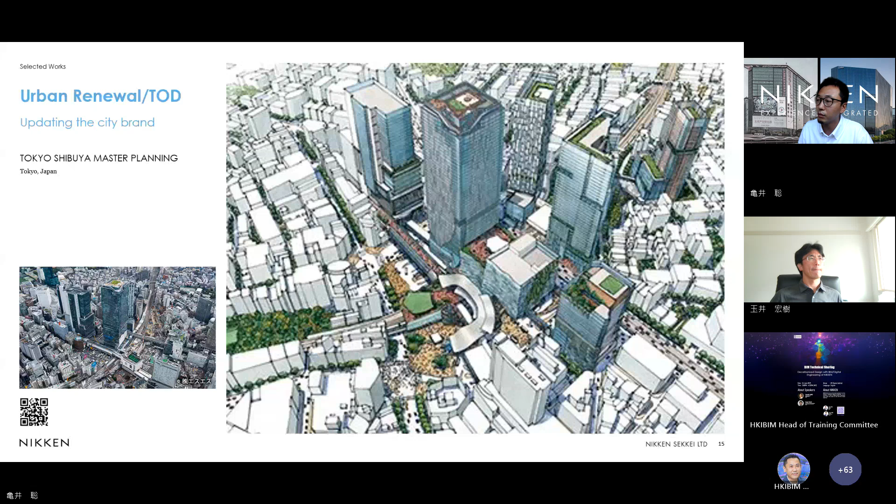You can see all projects on our homepage. This is a TOD in Shibuya district, and we also have these featured materials projects.

We are trying to realize projects that combine the quality exported from Japan with dynamic designs in global markets.

So we return to today's topic: NIKKEN Decarbonized Design with BIM and digital engineering. Today we'd like to focus on this topic.

In NIKKEN, we have this Tech Design Group. This group consists of three sections. They collaborate with designers on valuable projects using their specific skills.

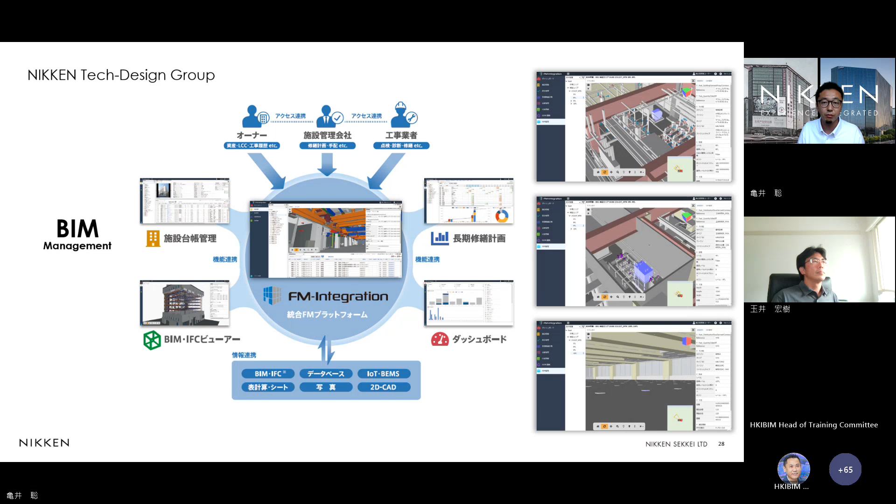And this DEL, Digital Engineering Lab, consists of special teams for specific engineering. Today's other speaker is from this DEL, so he can introduce it more later.

Last is the DDL, the Digital Design Lab. They are pioneers in using programming code to solve architectural and urban problems, including developing AI for architectural planning or 3D printing constructions and so on.

So we proceed with projects fundamentally collaborating within planners, designers, and architectural engineers. We can also collaborate with advanced engineers to realize a nicer, more comfortable, sustainable future.

This is today's content. Decarbonization is one of the most trending words in recent years in our architectural field globally, as you know.

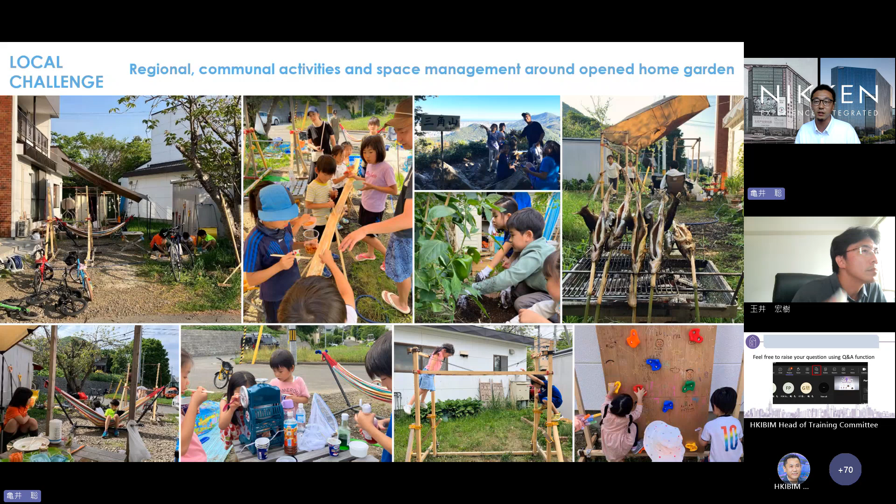So, I'll show you my projects from my viewpoint, my philosophy. This project is the reason why I'm here today, because I collaborated with Andy in HKIBIM from Tech for this project.

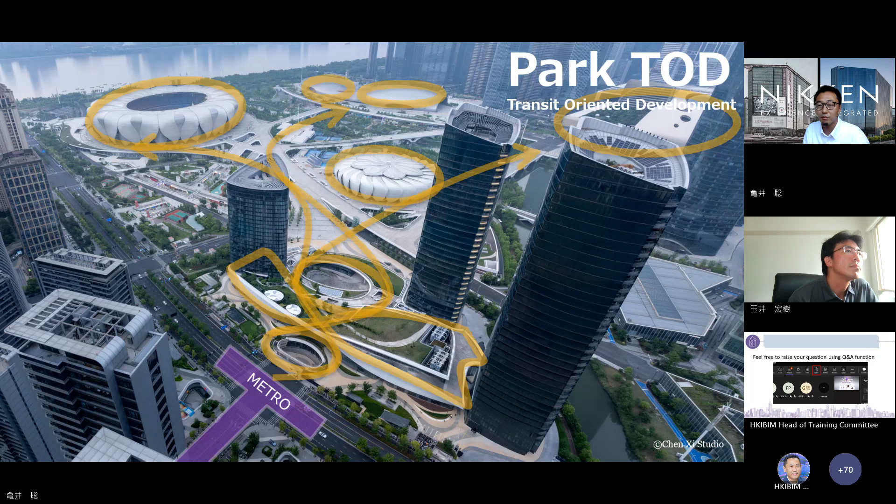This flow-like curve is not only for visiting people, but also for the landscape, greenery, the wind passing through, and the sunlight making shadows. The landscape on the rooftop is not completed yet, but it can be like this in the near future.

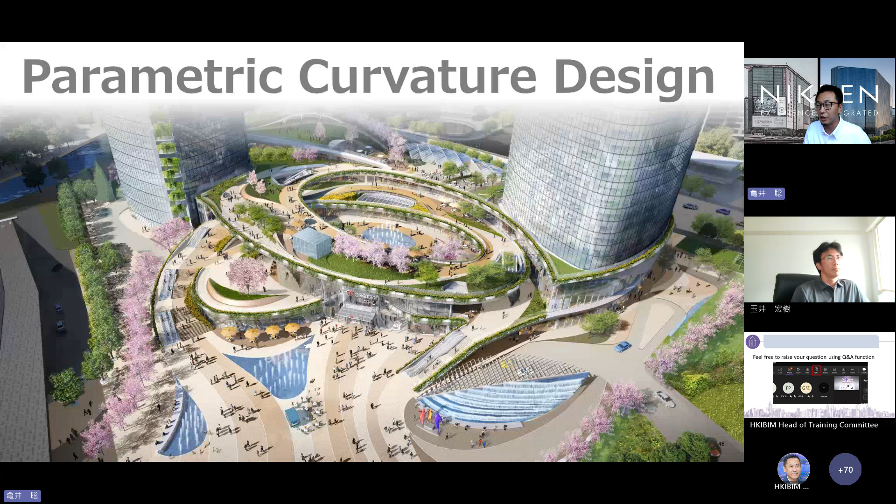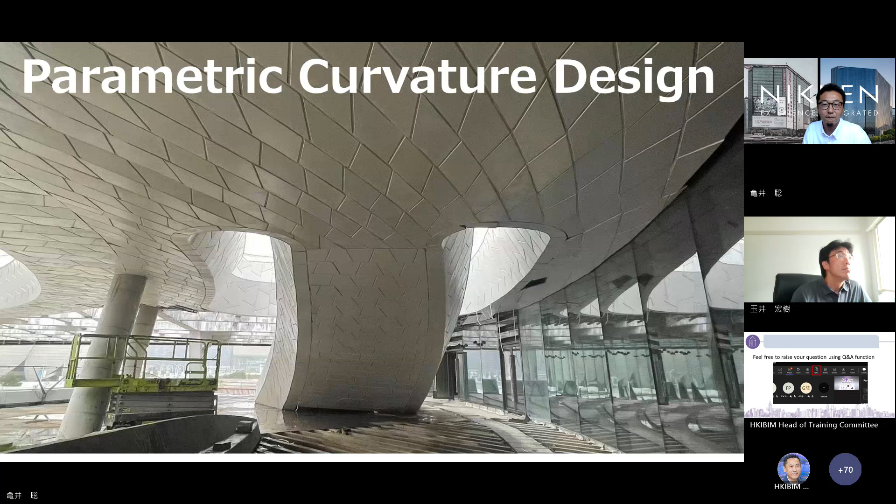And now it's like this, but in the near future, this place is to become a concentrated wellness park for living and visiting people here.

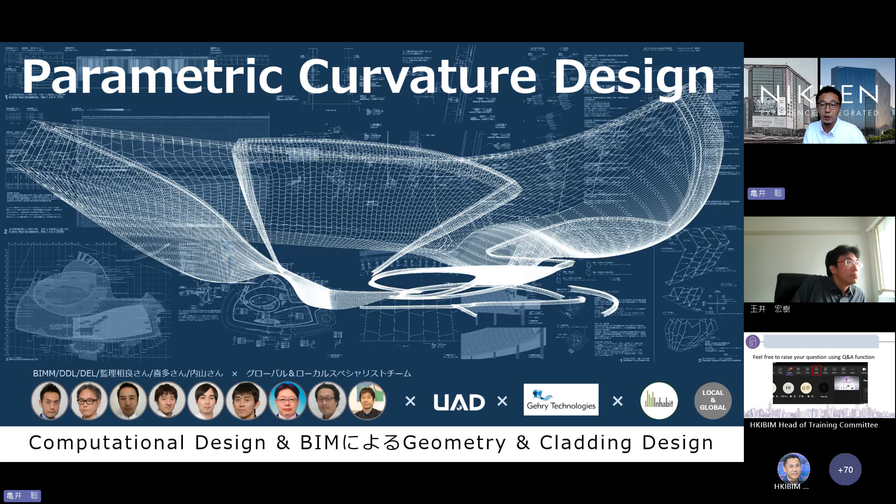In order to realize this complex design, we collaborated with internal and external specialists, both locally and globally, including Gehry Technologies.

Of course, this construction is much more difficult, but our clients and the construction teams made much effort to realize these complicated shapes and cladding.

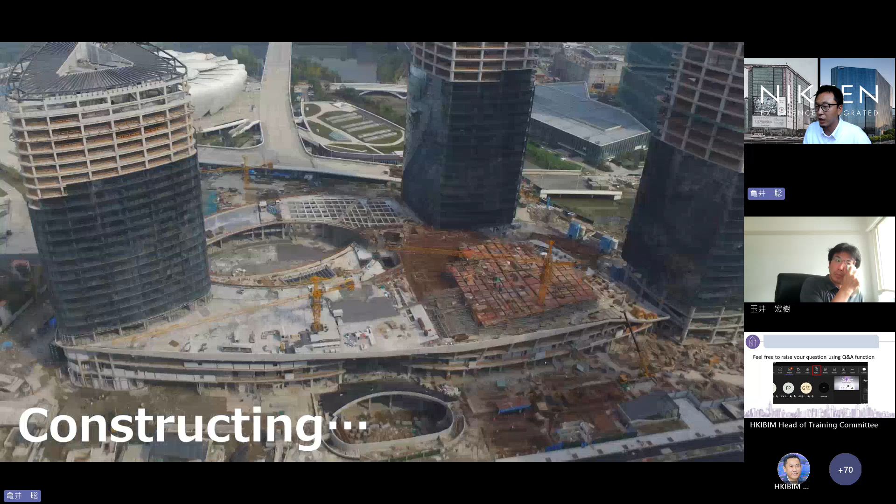When completed, this roof garden and the Olympic Park will connect to each other in one shape and one flow, to generate a new park-scape activated 365 days and 24 hours.

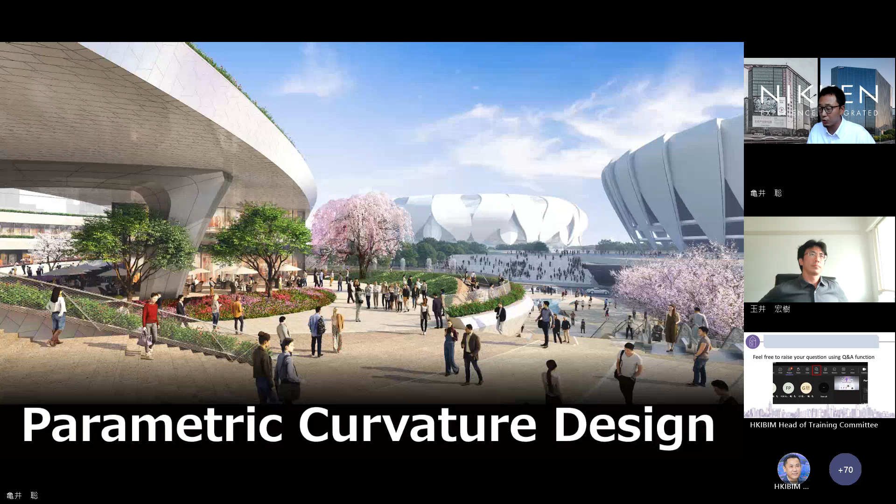So the building is almost completed, like this.

Technology allows us to trace natural elements to shape an architectural form. We need to decide the form carefully from the composition between every element in the site and surrounding the site. We might transform the surrounding visible and invisible environment and landscape through our forms.

So I will go to the next project. The second project is Takatsuki Arts Theatre, a cross fusion of digital and real. Actually this is not my project, it's by other designers, but I like to introduce it because I agree with the concept, and it must be replicated elsewhere, maybe in Japan.

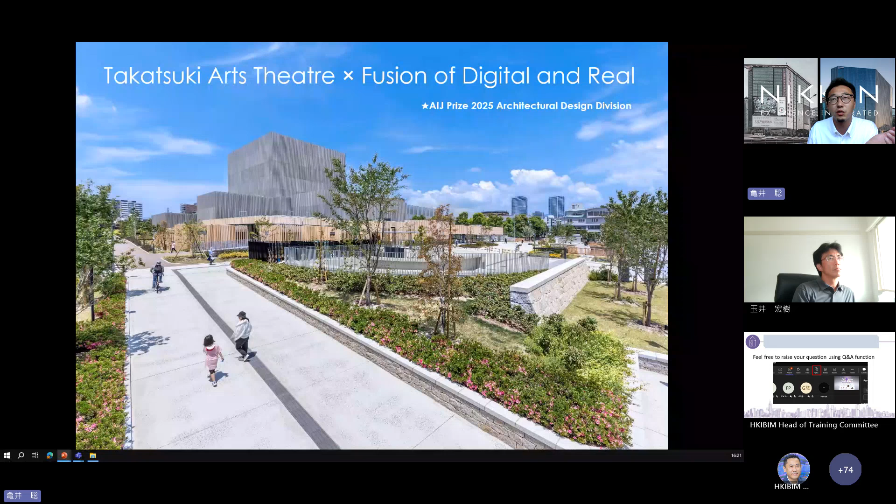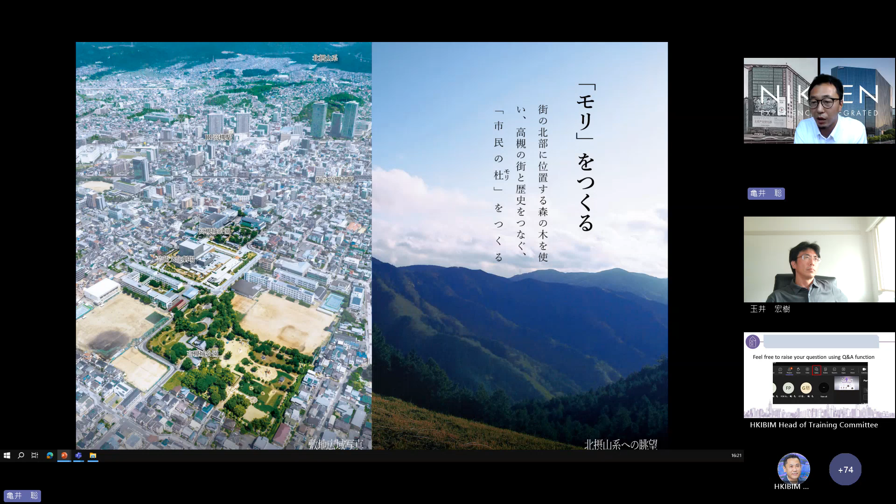This project is located near Osaka, in Takatsuki City. The area of this city covers part of the Hokusetsu mountains, similar to other Japanese cities. The concept is to create a forest in the city center by using internal woods in the city.

Forest covers 66% of the land in Japan. These wooden patterns in timber louvers are familiar in historical Japanese cityscapes, and the traditional structure of Japanese houses is wooden framework construction.

So human life needed much internal wood material. Many trees were planted in forests near cities more than 50 years ago in Japan, everywhere. But globalization and modernization changed the production of internal woods and their supply.

When the designers started this project, they recognized the quantity limitation of internal woods in Osaka Prefecture, which produces 1,600 cubic meters of wood annually.

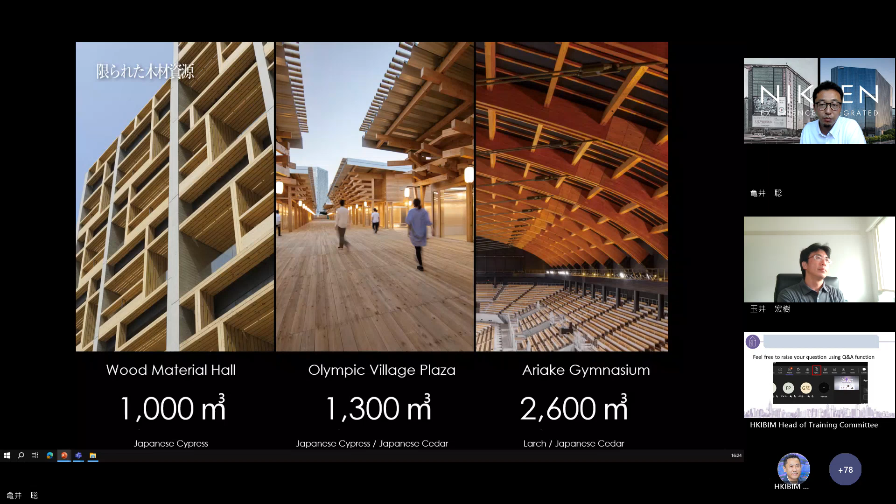So they decided to use 350 cubic meters of wood, divided over 3 years, only for finish materials, not for structure. This must be the best quantity and quality for the Osaka forest, they thought.

How to use these limited woods without waste was the next problem. The logs were sawn up and distributed according to sectional parts, since different parts have different properties.

The core, the central part, is usually used for structural timber, with slits, and the core is not used for finish. The middle part has a waterproof feature, and the outside part has water absorption and can be impregnated to be non-flammable.

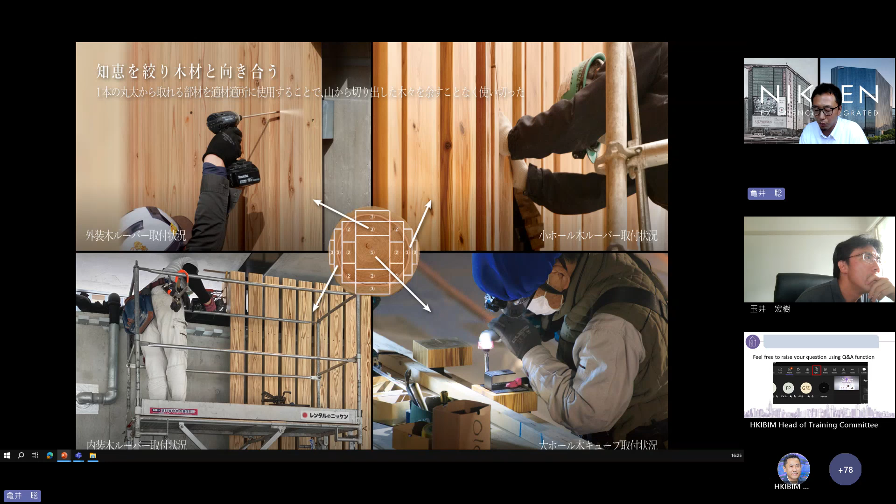According to these material properties, the woods were distributed to different places, creating different and specific expressions.

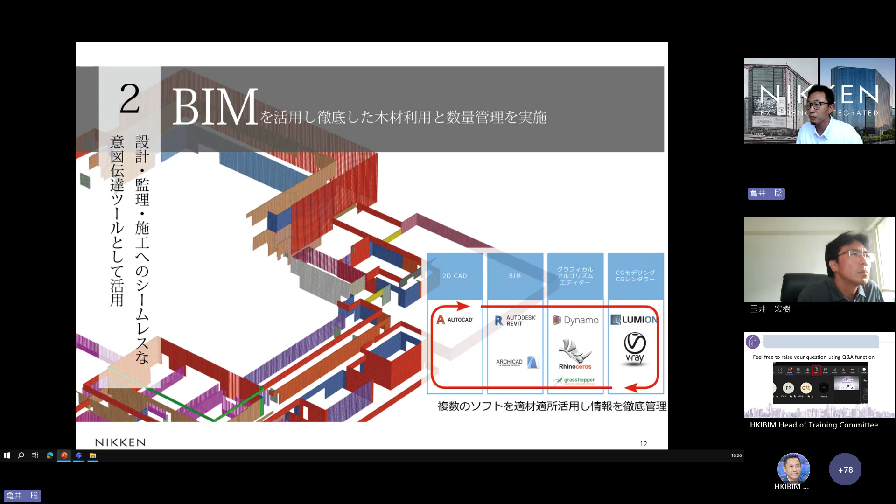This wood distribution and design has been controlled by BIM and other familiar design tools, as a method to control the quantity of wood materials. The number of sawed timbers, classified and calculated, was estimated before they were cut in the forest.

Of course, this number might change after they're sawed and calculated again. Designers make patterns for each division using tools like Grasshopper or other parametric design software. At the same time, BIM can calculate how much timber is used compared to the supplied quantity, so they must avoid both lacking material and waste.

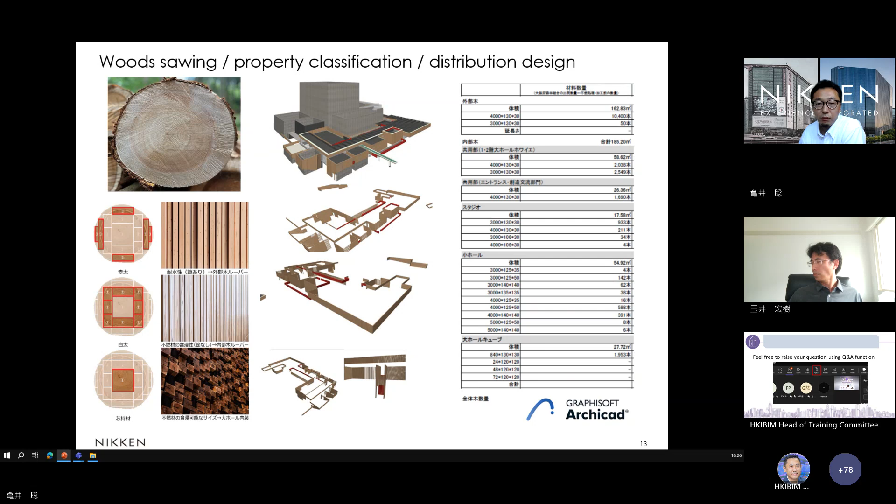This is the exterior waterproof louver made from the middle-part timbers. It's designed with Grasshopper, and tags were put on each louver with sizes indicated, leading to error-free installation along the tags.

Here are the louvers from inside; sunlight passes through, so it feels like being in the forest. This is the interior wall made from the outside part of the wood, impregnated with non-flammable liquid, since interior materials are required to be non-flammable under our architectural standards in Japan.

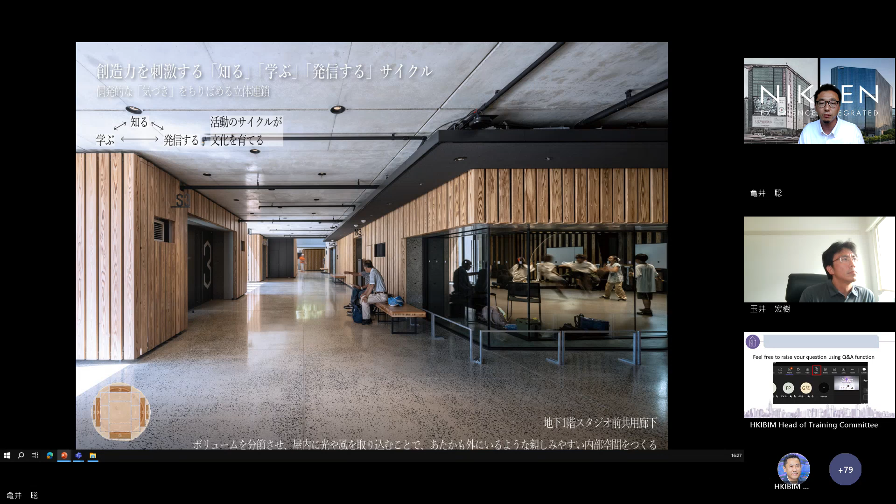This is the small hall. In this hall, the wall and ceiling are made from the outside part timbers.

Their angles of each timber are controlled from sound effect simulations, like this.

And at last, the grand theater is totally covered by the wood core cubes. As you see, you can see the cubes on the walls and the ceilings.

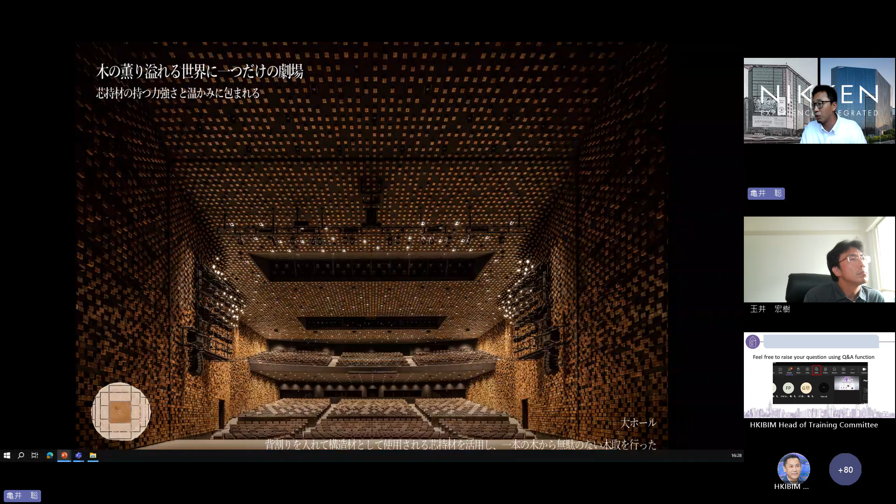Of course, the sound effect and visuals and construction ways are also simulated in BIM and other programs.

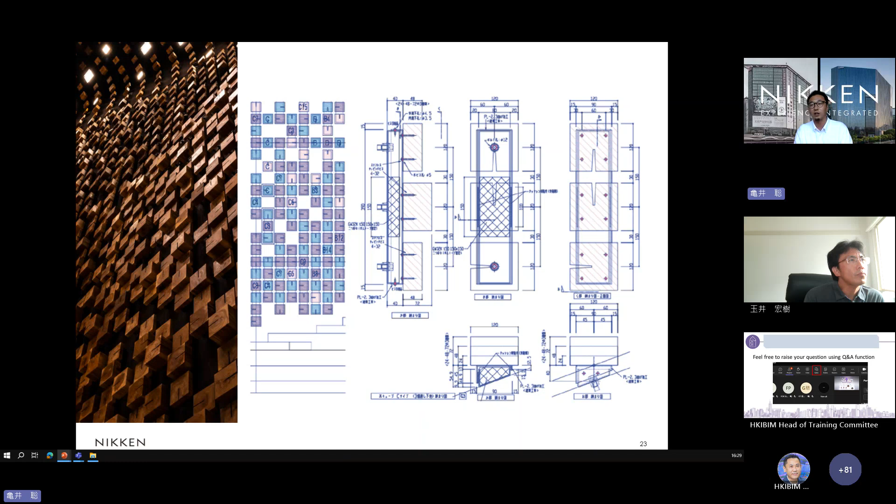But actually, the designers and craftsmen finally complete this work in a handmade way, like this. So this is the masterpiece collaborating technologies with craftsmanship, I think.

So this is the visuals, the final visuals of the whole.

So from this project, I think the technology might help to update the relationship between human life and the forest, which was forgotten after global modernization. And this topic might be a Japan local one, but I think it's also global scale, regarding the global environment.

So then I will pass the microphone to Tamai-san.

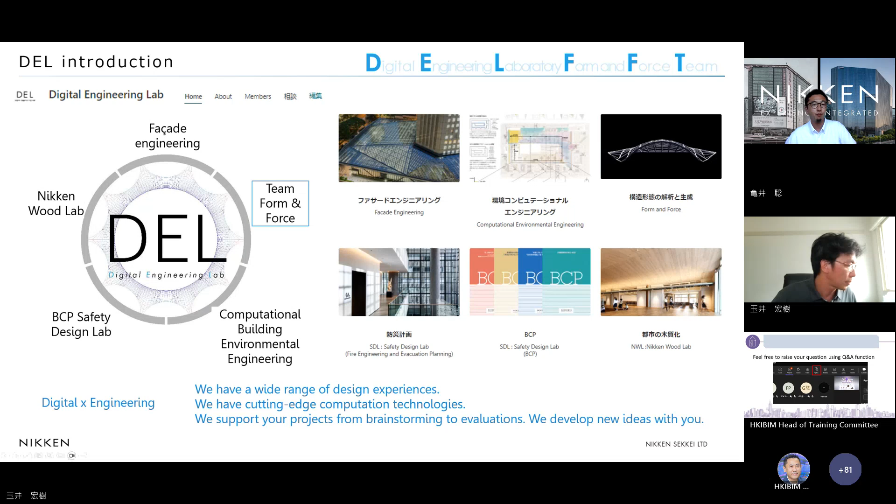So today I'd like to introduce the methodologies that our team uses to reduce embodied carbon in structures.

So form finding, structural form optimization, and graphic statics are our primary approaches. We do other things as well, but I will talk only about these three today.

Form finding corresponds to how nature uses materials, and structural form optimization is related to finding how nature makes a building ecosystem in nature. Then graphic statics shows us graphically how form and forces are related by duality.

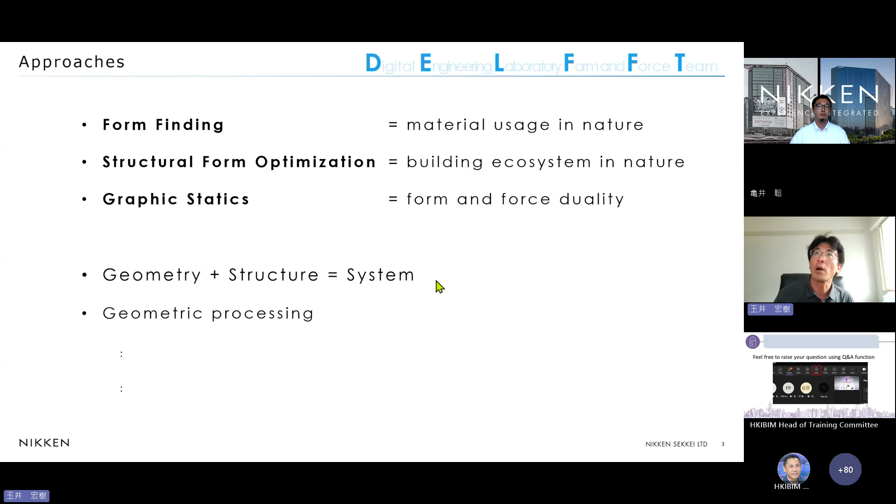Okay, let's start from form finding. Let's look at these four simple but yet essential structures.

Shells under compression on the left, spider web under tension, soap film in tension, and self-stressed spine and muscles under both tension and compression. All of these shapes transfer forces with zero or almost no bending.

This is how nature maximizes the use of material strength.

Did you notice that these materials have no shape of their own? To build a structure with these materials, we need to give the right shape through which the force can transfer smoothly without generating bending in the members.

They are namely shells, cable, and membrane structures and tensegrity. They can be stiffened by pre-stressing.

Unfortunately, you cannot choose a form like freeform for this efficient system. You have to find a form in equilibrium. This is why this technique is called form finding.

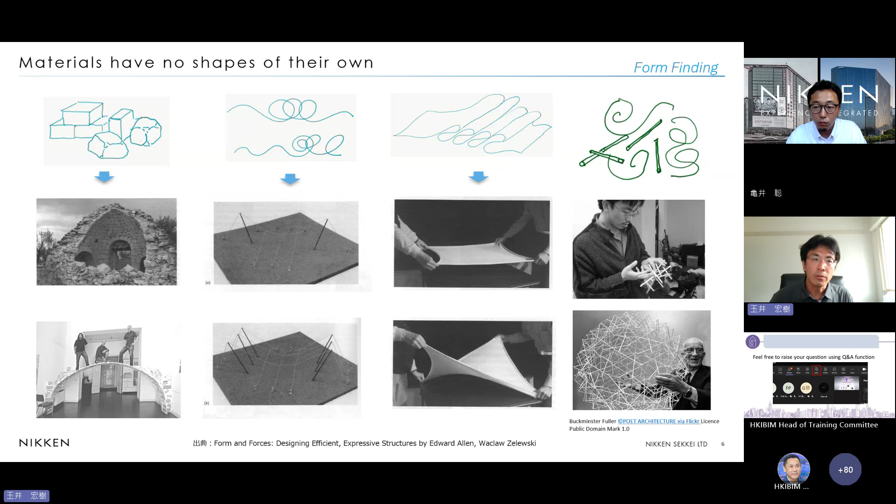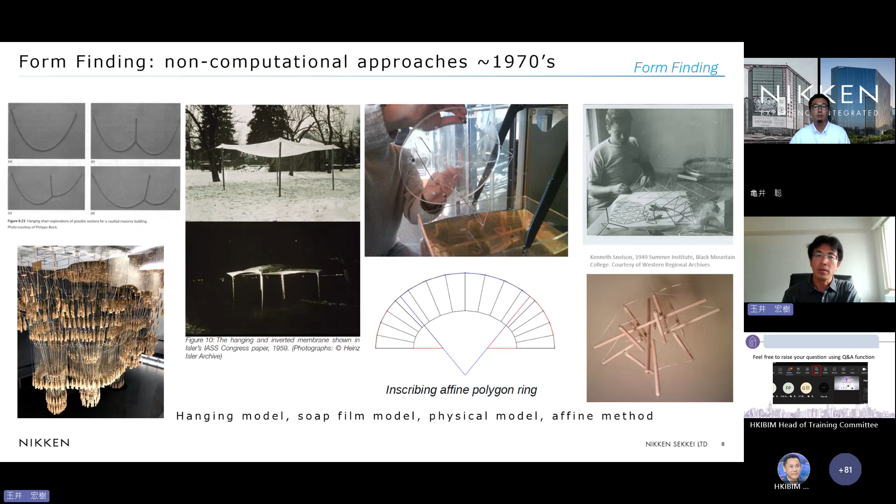How did they find the forms? Historically, before computers became available, they used physical models or graphic approaches, as shown in this slide. Nowadays, we use computational methods.

I will show you a few visualizations of computational form finding for typical structures that require the form finding process. These are, for example, grid shell, cable tower, or these are variations of spoke wheel system and footbridges.

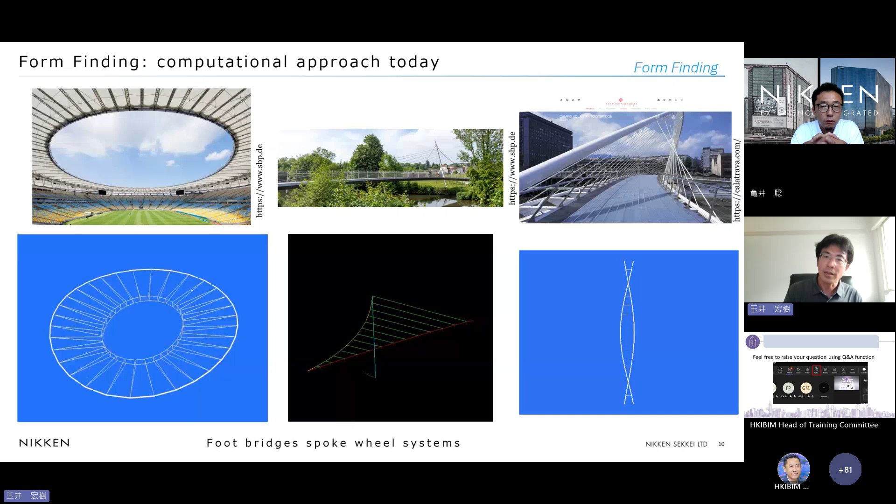Please note that these demonstrations are conceptual and intended to illustrate how they work and how they have been applied. My concept study has nothing to do with the actual design of the structures used as reference in the pictures.

Although I'd love to show you how we can apply these techniques in our office, it's a bit unfortunate that I'm unable to share most of the projects because they are ongoing projects. But I will show the next slide.

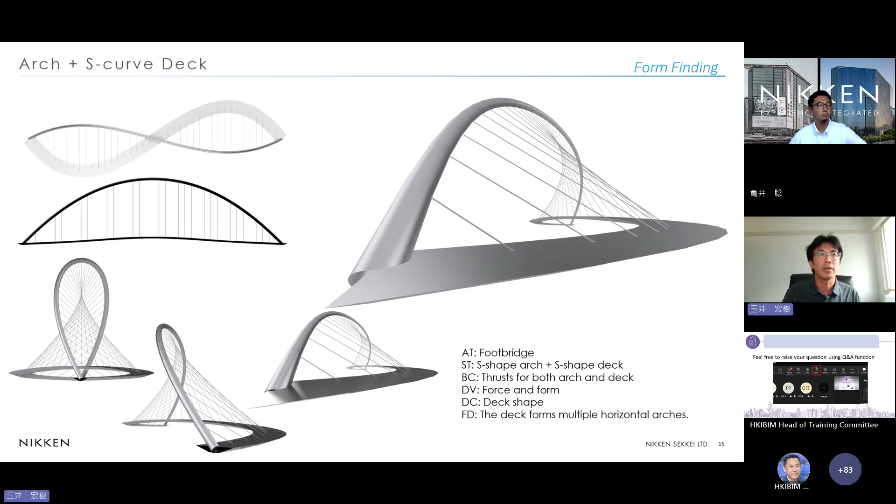To give you some more ideas about what you can do with form finding techniques, the following slides show more conceptual studies. This study shows that if the footbridge deck is an S shape, the arch follows accordingly. I hope this result starts inspiring you.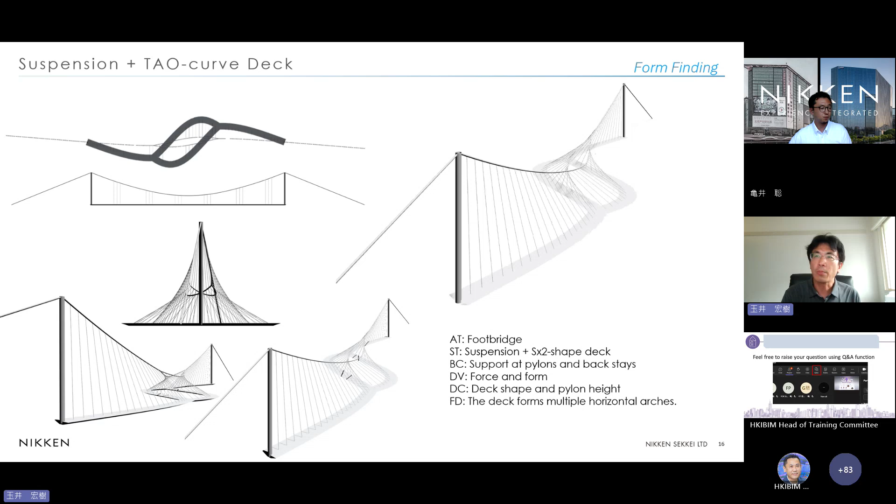This can go a bit further in detail to show that the equilibrium form can be further balanced in detail. This has an eccentric load, but please recall that all elements are in equilibrium.

The following two slides will illustrate the form finding of a cable net structure used to suspend a retractable membrane roof. The first assumes a stadium scale, with the boundary as a rigid oval ring. This form finding problem has more than one unique equilibrium solution, so we can choose one such that the membrane can fold along longitudinal directions without tearing. The sum of the force differentials is minimized to reduce the required clamp size.

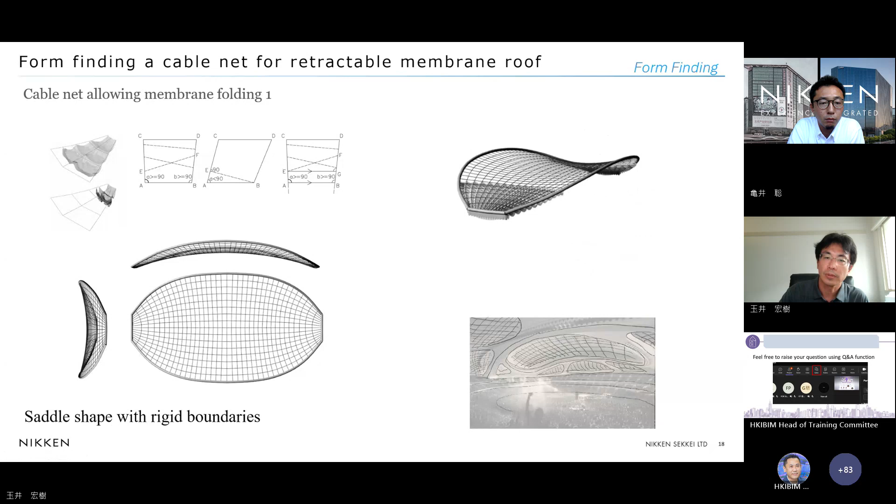The next one is similar to the last one. The difference is that the boundary for this project is not prescribed; instead it is part of the variables to be determined. In this project, the covering was proposed for an amphitheater on one of the school campuses in the US.

These two cases demonstrate that a form determined by a form finding technique can represent not only a force equilibrium, but also an architectural concept.

This is an experiment, a thought experiment. In my opinion, one of the limitations of tensile structures used in architectural design is that a tensile system always requires a saddle shape. Can a tensile structure have a convex shape all around? I challenge this question, and this is one of my answers.

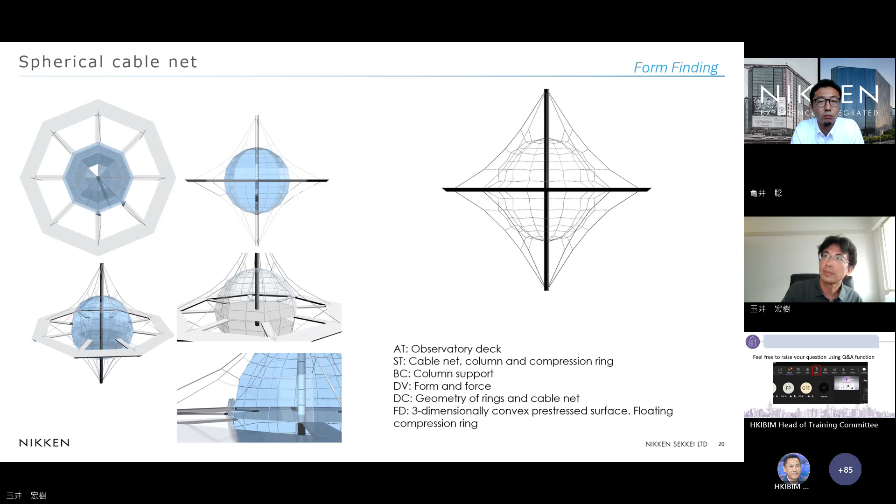All right, so the next story will be about structural form optimization. Let's ask ourselves what optimal design means. We can find hints in nature again.

Do you know this fish? This is a flounder. It lives at the bottom of the sea, lying flat, so it must feel higher water pressure than other regular fish, especially when it pulls up its body from the ground. It needs a lot of force.

Let's see its bones. It is different from other fish in terms of the position of the joint. Probably this makes it easier for it to pull up its flat body from the ground. So what else? Let's look more closely. If you look very carefully, you can find each bone shaped like a wide flange steel beam.

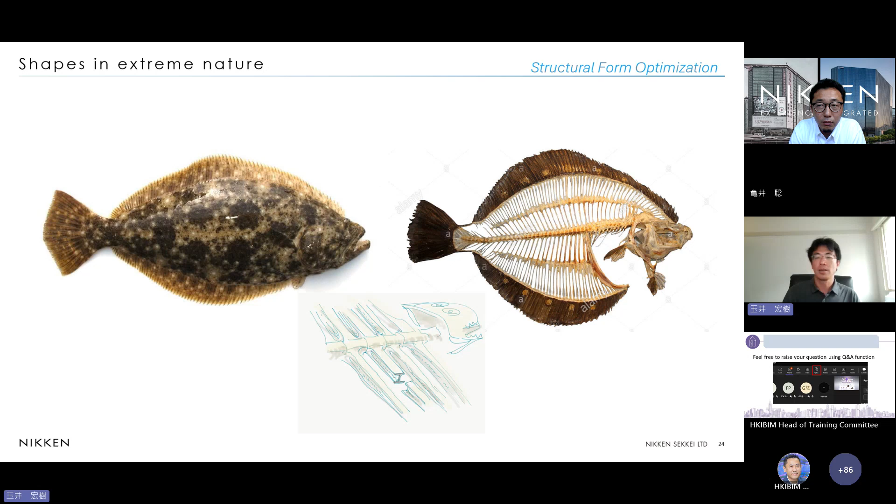I think it's amazing. And yes, I sketched this because I forgot to take a photo when I was cutting and cleaning this fish, which I remember very well. So next time when you cook this fish, please watch very carefully.

One more: this is a picture of a giant cactus. They can grow in extremely hot and dry regions, and they store water in their stem. So where is the structure then? If we take a look inside, for me it looks exactly like a tube structure for a super high-rise building.

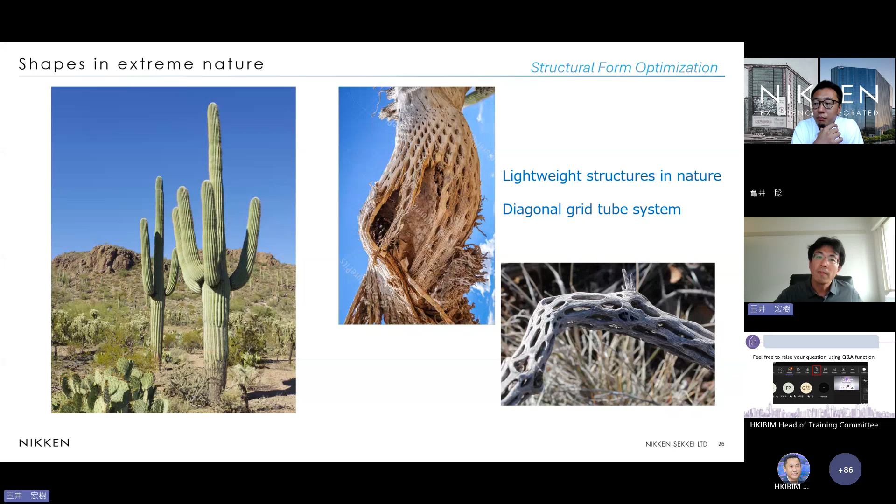So what can we learn from these two creatures that live in extreme environments? My interpretation is that adaptability extends diversity. This is actually how I look at form optimization of structures.

Technically speaking, optimization is nothing more than minimizing something under specific conditions. It can be displacement, steel tonnage, etc. Anything can be chosen. The other variations in structural optimization include optimal assignment of cross-section, topological optimization, form or shape optimization, or a mixed use of these techniques.

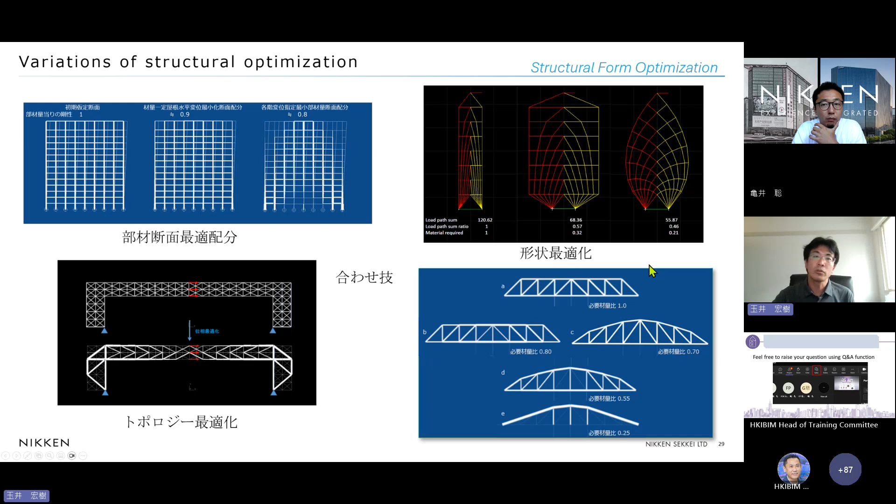Why do we like to optimize the shape? Because it is more effective than cross-section and more practical, in my opinion, than topology. So let's see a NIKKEN project now.

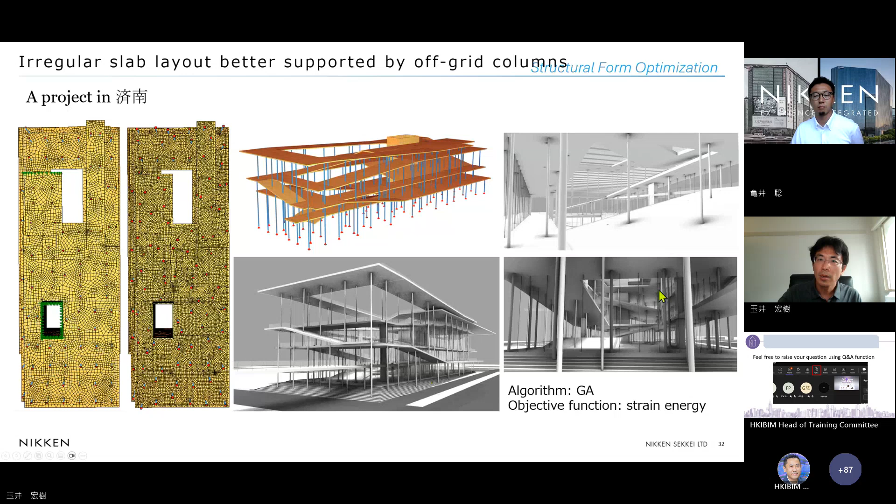This building, part of a project in Jinan, has an irregular floor slab layout. The column layout in a regular grid would not make sense. We applied a heuristic optimization algorithm to find the better column positions, which in the end appear very random, but successfully reduce the floor displacement to one third.

This is a regular one. This is the optimal column position.

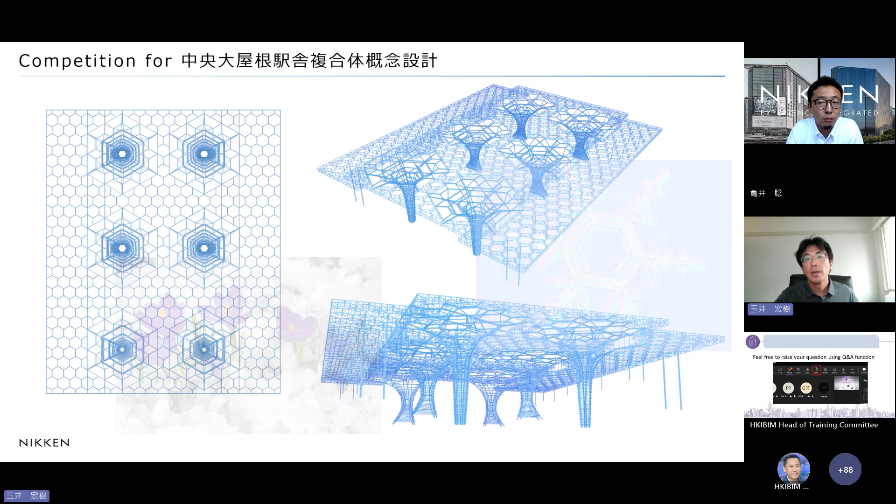By applying horizontal load in form optimization, we can see that bundled columns are transformed into a bracing arrangement.

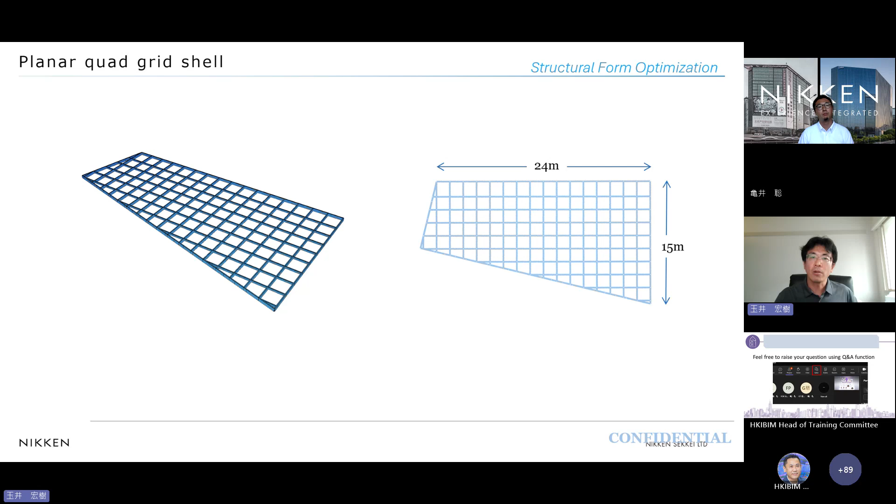In the following slide, I will show you a grid shell form optimization for a partially rectangular but asymmetric plan. It is required to have a squared grid mesh in plan, and of course the quadrilateral frames are supposed to have planar glass paneling.

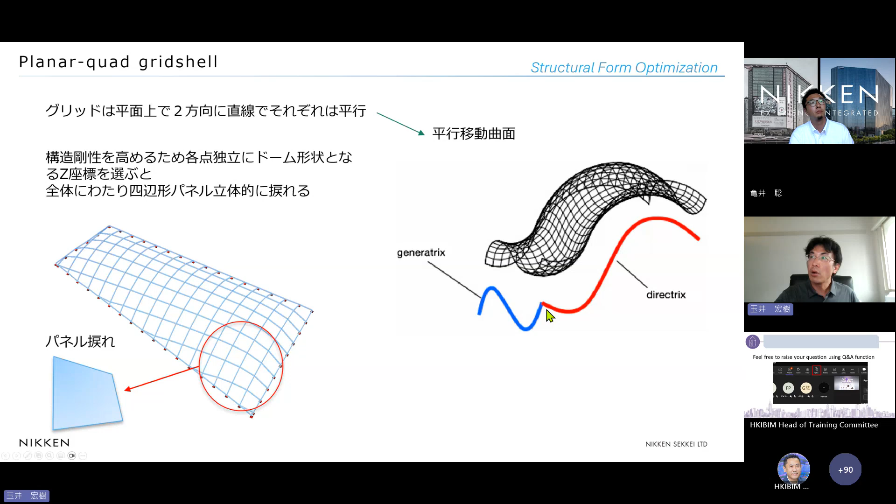If you take z coordinates of all nodes as an independent design variable, you will end up with a twisted panel. So we apply a translational surface, as shown on the right. By translating a polygonal generatrix along a directrix, we can generate a surface with all facets being planar. Therefore, our design variables are the shape of the generatrix and directrix.

However, we have another challenge in this problem: boundaries have to be modified accordingly. So these are our proposals for the designer. Please recall that all quadrilaterals are planar and boundaries are updated during the calculations.

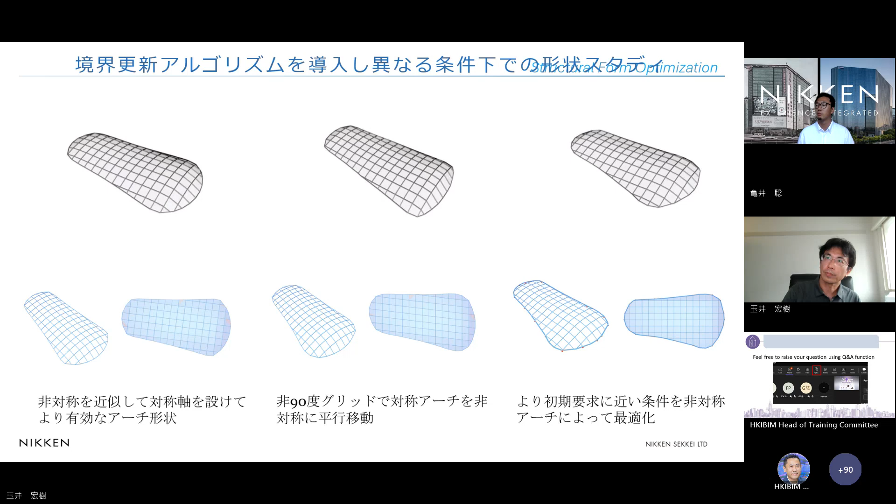Sometimes we don't need to make planar panels strictly planar. In the following slide, I will demonstrate how to create a smooth grid shell without using control points of the NURBS surface, like in Rhinoceros.

The simple case study illustrates that the corrugated roof can reduce the displacement, potentially leading to a reduction of steel tonnage. However, with all the coordinates being independent design variables, the solution shape will be zigzag and not so smooth.

So we apply a Gaussian function as a low-pass filter, analogous to pictures, sound, or graphics. Depending on the size of the filter, we can change the degree of smoothness of our structure.

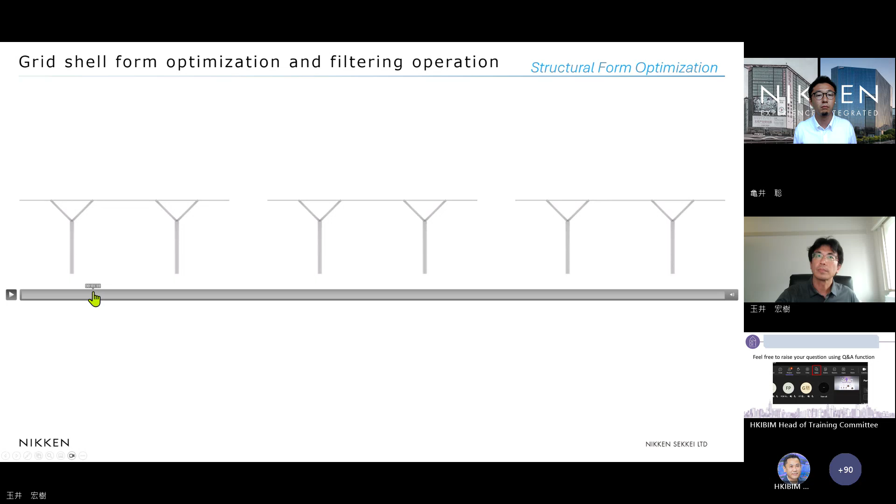This project is an example in which the filter operation filters the optimization process. The filtering process is performed not just at the end, but throughout the whole optimization process.

In this case, without filter, it can potentially save 40% of steel tonnage and the corresponding carbon dioxide emissions, but it goes a bit too far from the architect's desired shape.

So we filter with the proper size, and then we can achieve a smooth approximation of the desired form while still saving 15%.

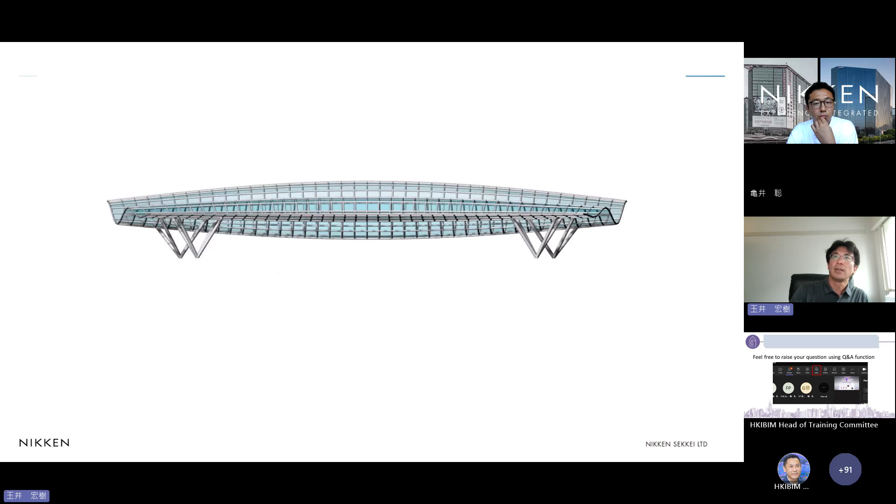This form optimization again is an experiment to see how form follows force and how the filter can effectively smooth the surface. Now that was without filter, and that was zigzag. Now with filter, can you find the form follows somehow the moment diagram, right?

So now finally, we will explore the duality of form and force. It is more than how form relates to force and force to form. What this duality indicates is that form is identical to force. When you see a form, you already see force.

When you studied architecture in school, many of you learned how to solve the truss graphically. Remember or not, all you need is a pen and a ruler, translating this geometry into a force diagram. In the force diagram, the lengths represent the magnitude of the force.

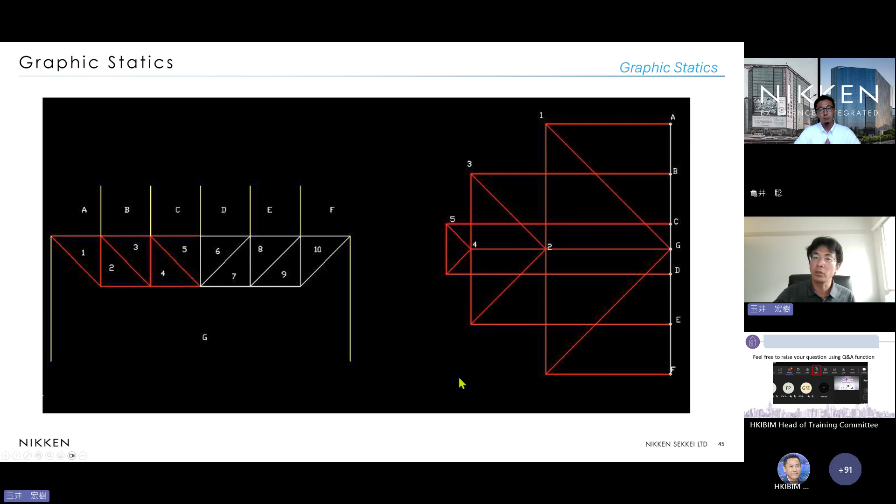There's actually another step that you might not have learned in school: you can play with the force diagrams to make the lengths smaller or zero. In this case, the force between 3 and 2 becomes 0, and these become equal. You trace back to the form to have this truss, which does not need diagonals.

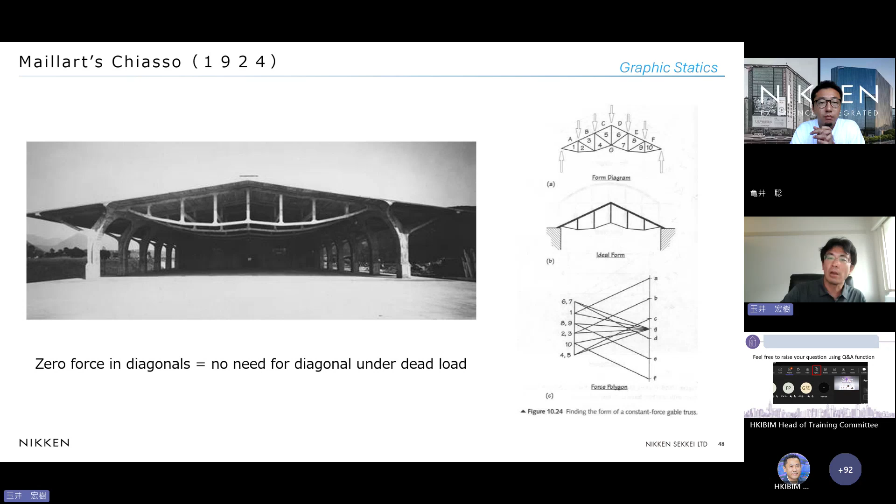I will show you 3 legendary built examples that are believed to utilize this classic technique. The first one is the storage roof in Chiasso, designed by Robert Maillart. Now you already know why this truss does not have diagonals.

The third one is the Salginatobel Bridge, by Maillart again. He used graphic statics to determine the arch shape of the bridge and the sequential variation of the cross section.

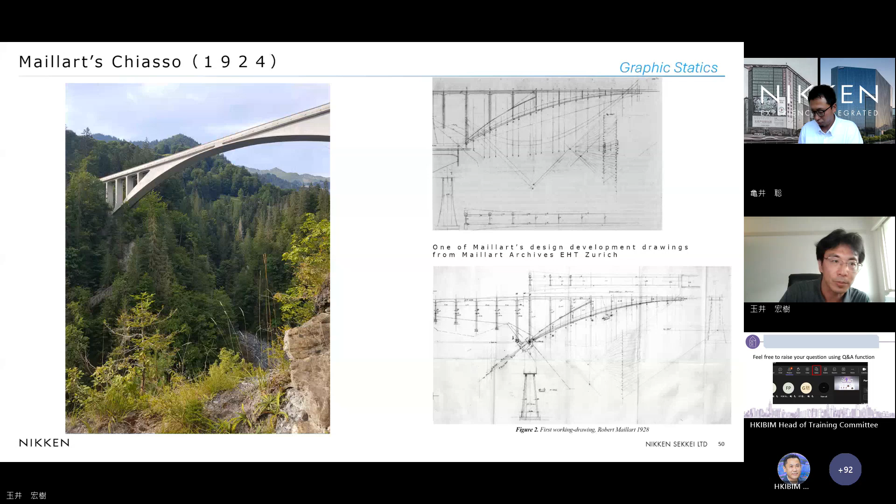Unfortunately, again, I cannot share any project where we used a graphic statics approach to design in some of our projects, but instead I will briefly explain the duality of the method and how it can be applied to the form finding of a spoke wheel structure.

So this slide illustrates how form and force are dual. This is your familiar truss form diagram with force indication here, elevated vertically to make a polyhedron.

Each node of the polyhedron is associated with 3 XYZ coordinates. With these three pieces of information, you can represent one surface. This is a dual relation.

Then convert this polyhedron to this other polyhedron, which is green here. Now project down to the ground, and you have the force diagram that you saw a few slides back. It's like magic, right? But this is...

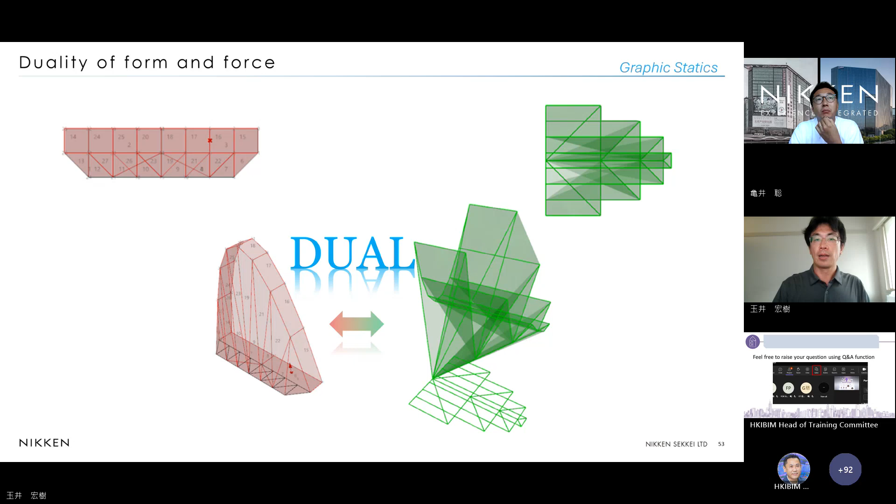dual. Applying this concept, you can perform form finding for spoke wheel roof systems much more efficiently. The left diagrams are forms, 2D forms of the spoke wheel system, while this one is a force diagram. They are identical, but the forms are different.

This force diagram represents equal and uniform forces in ring members, and actually in spokes also all equal. But you can choose forms. So this is an optimal set, but you can choose the form. This is the important point.

For example, this one is selecting the form by minimizing the sum of the squared length of the ring, and the other one is minimizing the variation of the length. Good things are not only the force optimal set, but also you can draw this geometry without using nonlinear calculation at all.

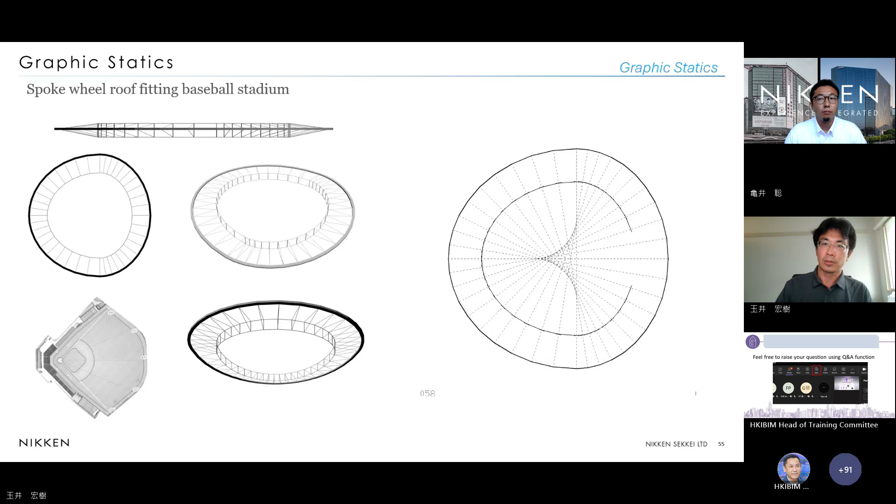Then applying the duality, the polyhedron, you can solve the spoke wheel with more arbitrarily selected ring geometry, like these ones. So this is a totally new horizon in this field. This was just a brief introduction of this 3D stress polyhedron

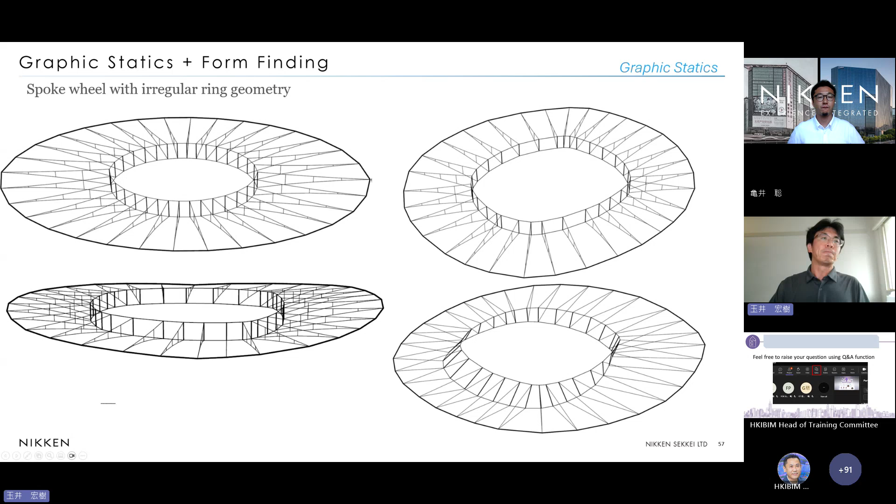because I couldn't show any of our projects. So, this is my final summary. Form and force matter for structural efficiency and the economy of natural resources, and reducing embodied carbon. Form and force matter for architectural design expression and diversity of structural potentials.

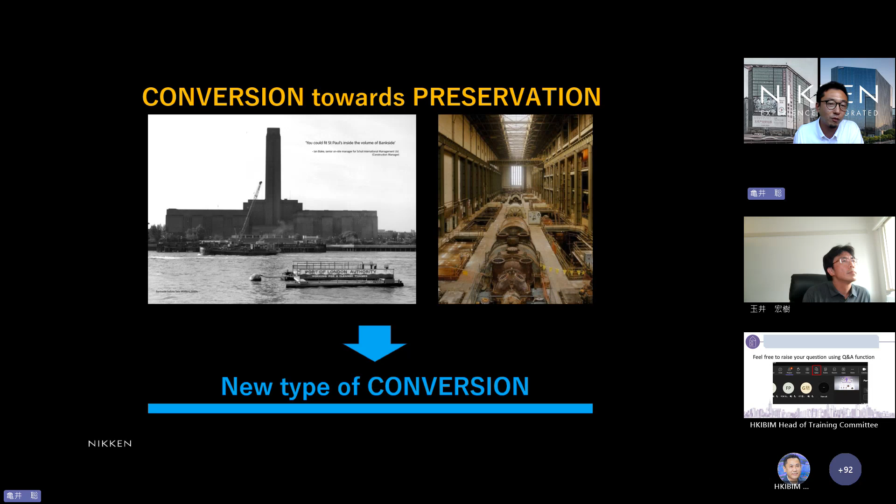I can tell you these 3 reasons: one is speed, second is program, and the third is system. About speed, recent Chinese growth has been extremely rapid, as you know. These 20 years are long enough to change construction technologies more than the same term in developed countries.

The second one is about program. In this project, we were required to convert an electronics market into innovation offices, as per local demands. The third one is the most critical reason in China.

In China, a developer must obtain government approval to use the land. If the development changes, Chinese regulations require project reapproval. So major real estate in China belongs to the national government. As such, it is possible that developers are increasingly opting for refurbishing instead of new construction.

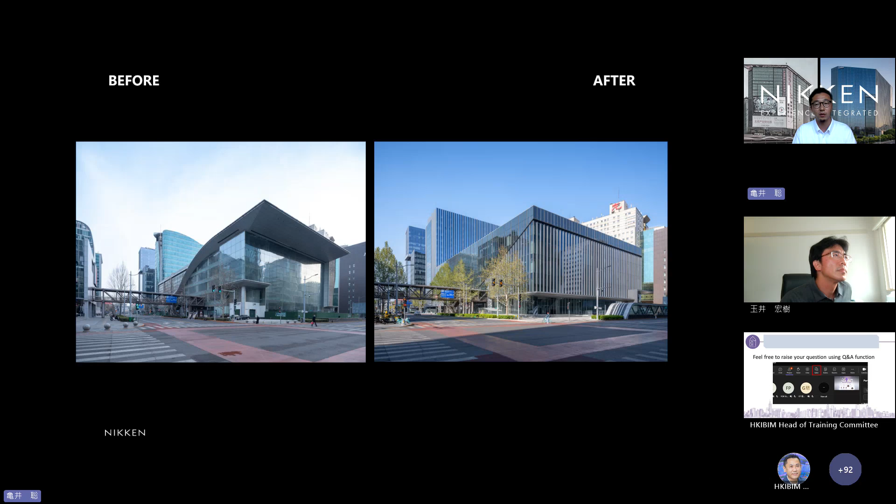But the most important thing is the most critical reason regarding China's land use system. It's critical in concluding the efficiency of this kind of development and the sustainability of the global environment. Let's see the details of this project.

So this old electronics market was hollowed out and reborn with these 3 distinct visions.

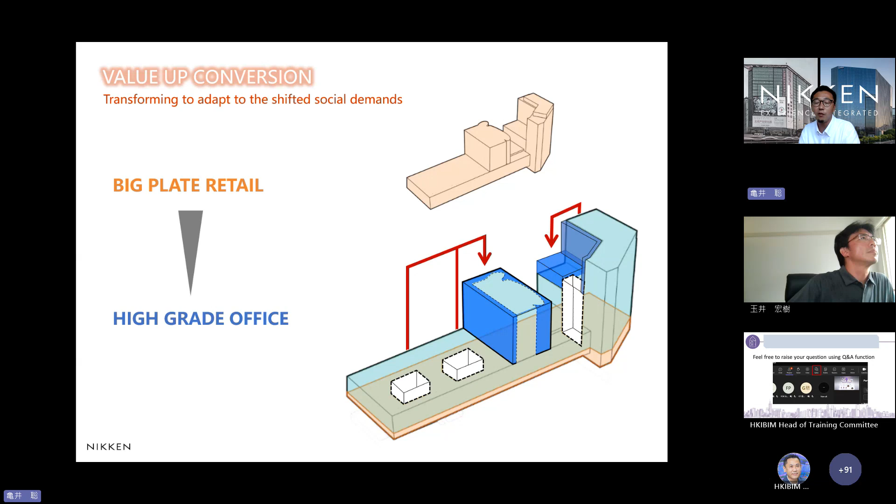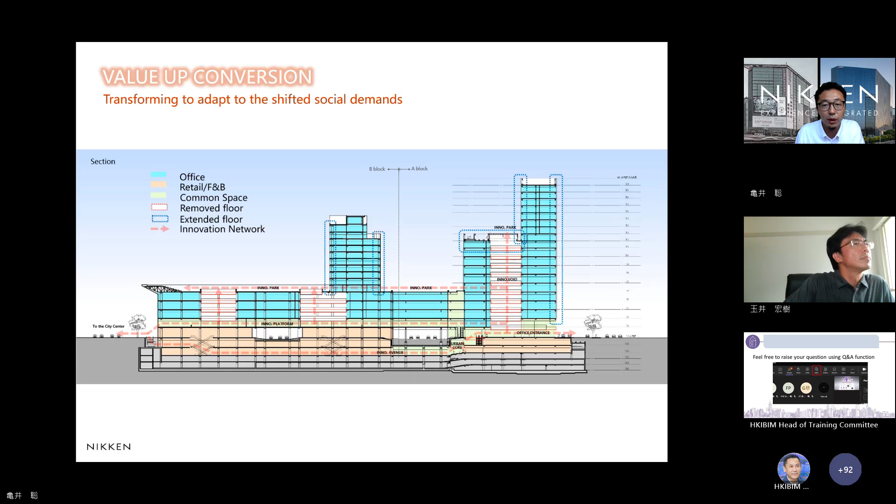It had to be done within the strict framework of the former development. This is the sectional view of the entire development, with 3 hollowed out voids in pink and extended floor in blue dot. We rearranged the floor area to maximize value, adapting to shifting social demands.

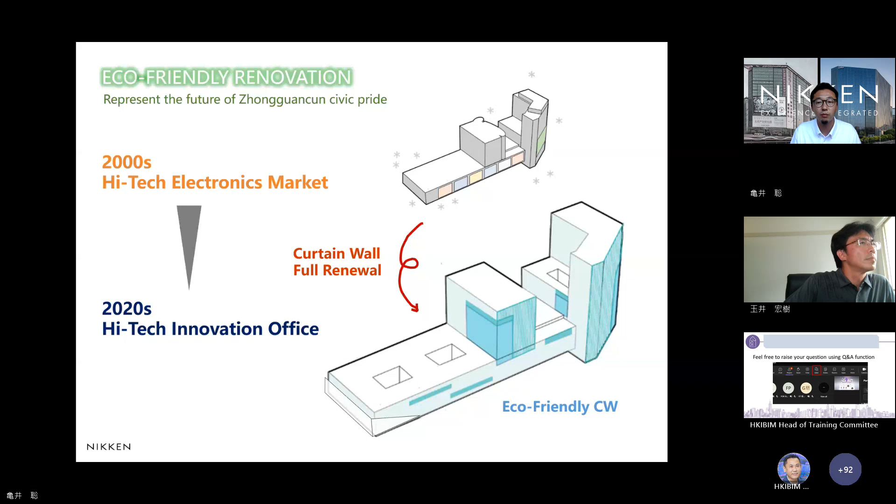Vision 2 is eco-friendly renovation. To begin, this existing curtain wall, installed 20 years ago, was refurbished and updated to the latest Chinese building standards. The environmental performance was boosted by at least 30%.

Interior MEP systems and landscape were also renovated. I'll introduce them later. Vision 3 is innovation networking.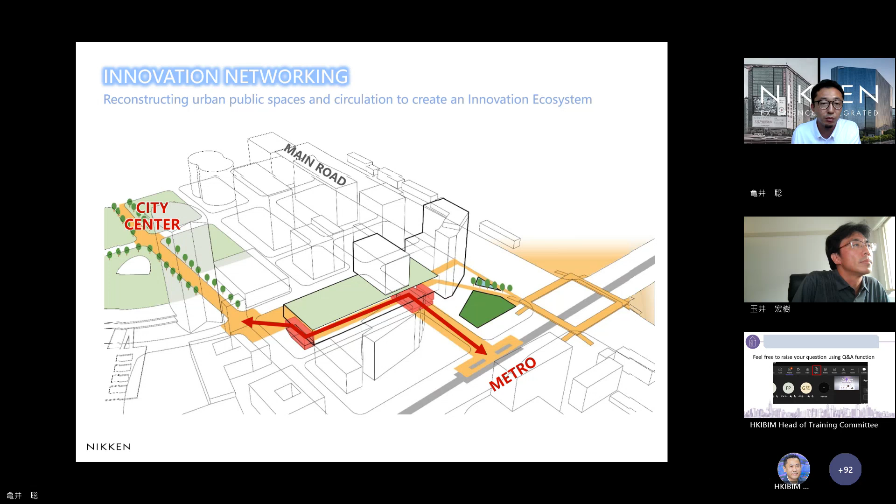The underground corridor in our project connects to the metro station and the city center. This corridor penetrates the building's common areas, achieving an urban innovation network. The network leads to the office lobby, where workers, innovators, and investors can meet and collaborate over coffee.

The landscape was also redesigned to match the neighborhood. This is the main office entrance, open to the station plaza. As such, urban public spaces and circulation were recreated. And this network will add value to the Zhongguancun innovation ecosystem, with this building serving as the core.

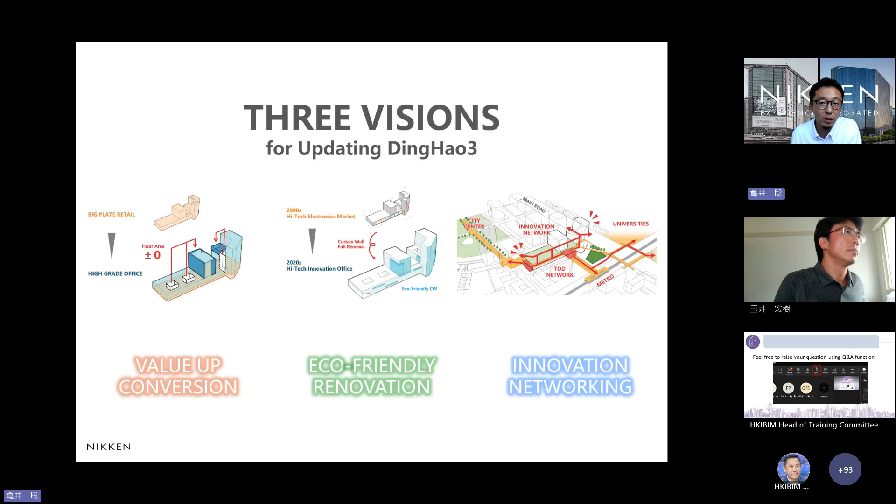These 3 visions were realized by updating the existing building and its stock. Through this process, we undertook efforts for 2 kinds of decarbonization: embodied decarbonization and operational decarbonization. For the first, building use may continue while value is increased in response to stronger demand by transforming it like this.

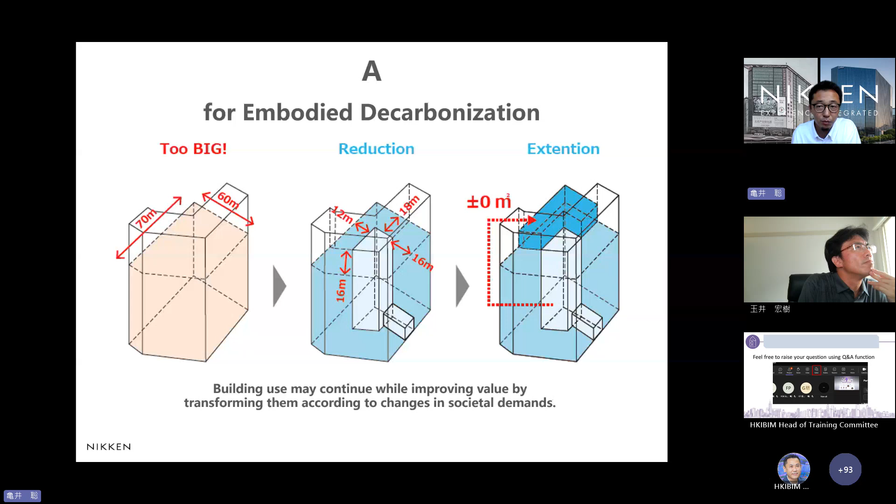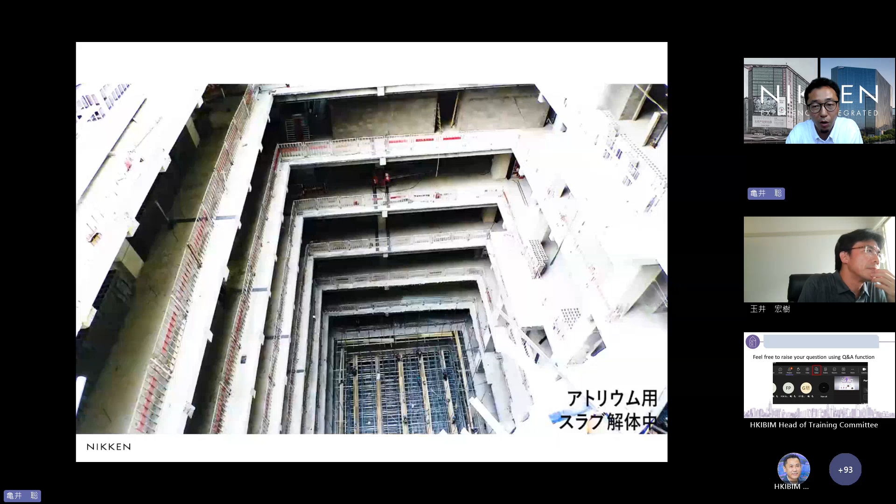This image shows the demolition process for the atrium space. This was not simply a hollowing-out task; much care was required to maintain the structure. An added floor area with steel structure was integrated with the existing concrete structure. As a result, compared to scrap and build, embodied carbon emissions were cut by almost 60%.

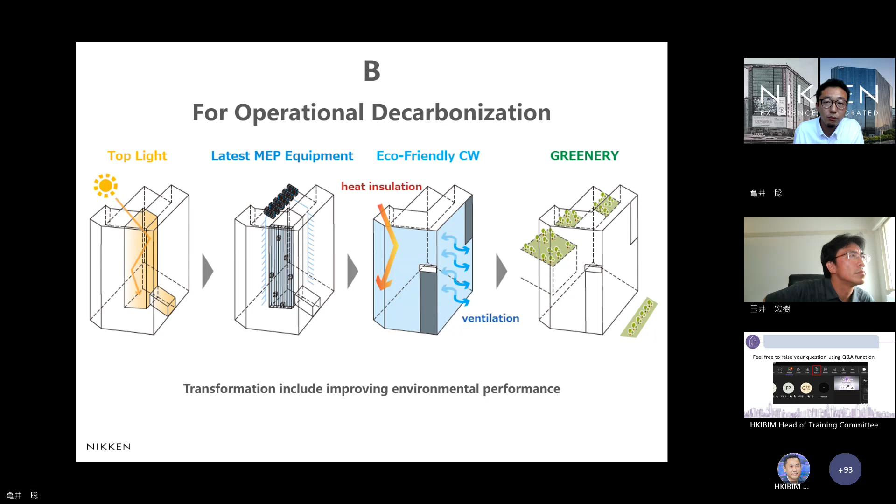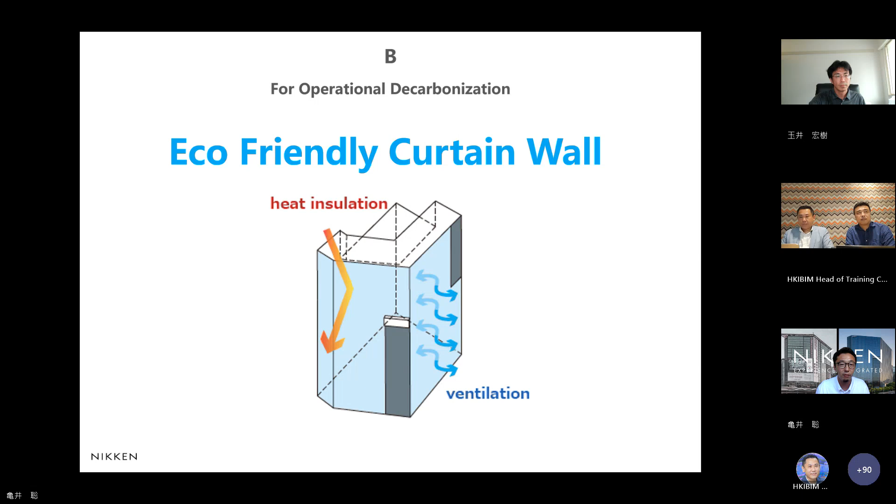This eco-friendly curtain wall also saves energy, improving heat insulation quality by 40%, while these vertical fins help block solar radiation. Greenery also helps insulate against solar heat and emits fresh air for workers.

And through such decarbonizing transformations, annual operational carbon emissions were cut by almost 40%.

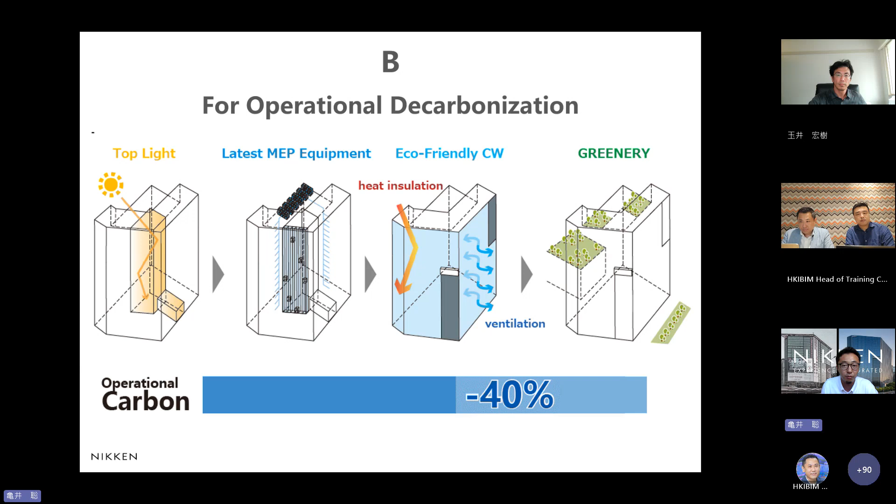And finally, significant environmental conservation was achieved like this, and investment efficiency was also achieved, as construction costs were cut by 60%, almost the same as the carbon reduction.

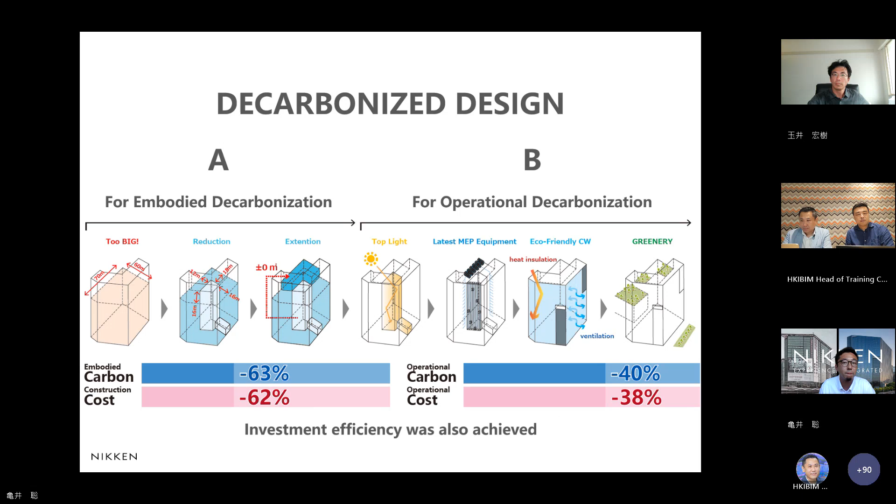$94 million was saved from Tower A alone, and rents have increased by 50%.

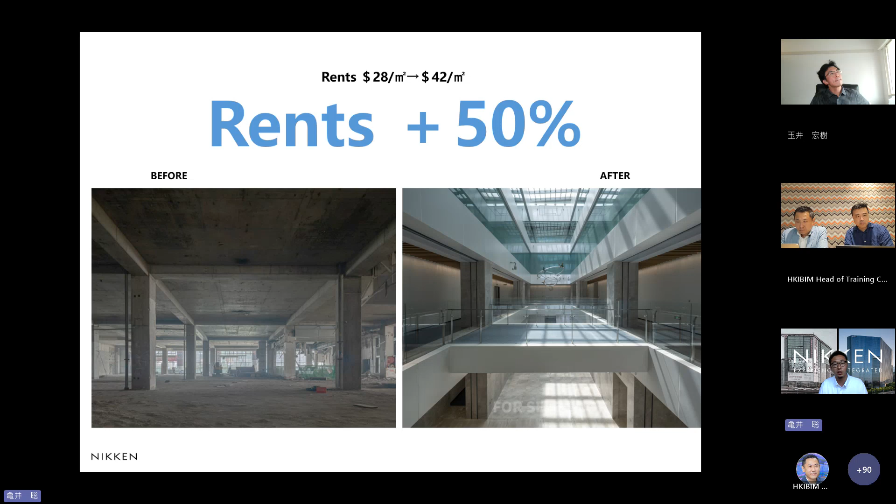At the same time, 35,000 tons of CO2 were reduced—equivalent to 10,000 flights from London to Singapore, or 70% of all of Singapore's forest's annual absorption capacity.

These efforts resulted in obtaining LEED Gold and WELL certifications. And in the process, this building has also become a place for people to enjoy a better social life, as the core of innovation.

Our clients continue to pursue sustainable efforts. This digital twin for facility management could evaluate the amount of energy flow in the building and city to reveal its sustainability.

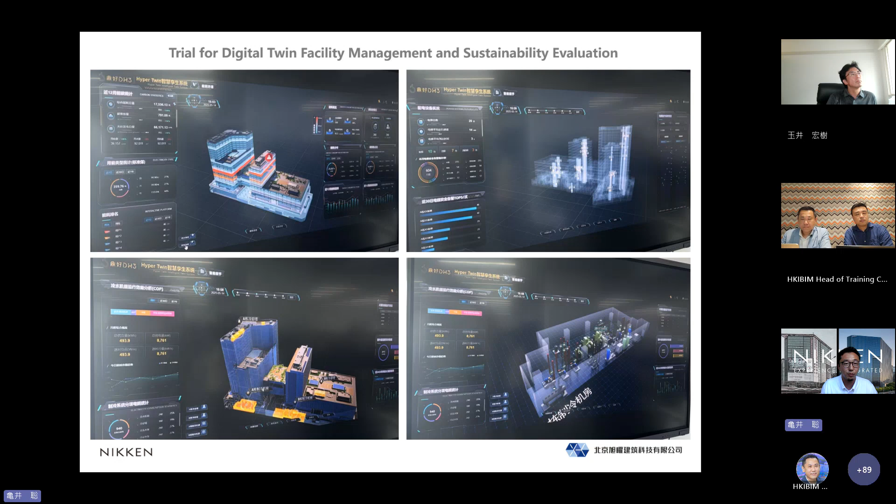This is a business model with a bright future.

Most importantly, I'd like to say that this original building doesn't have cultural or historical value to be preserved in a general way. It's just an anonymous, general building—we can find it everywhere, in China, Japan, Hong Kong, everywhere in the world. But we believe this development model must be replicated around the world as a catalyst for global sustainability.

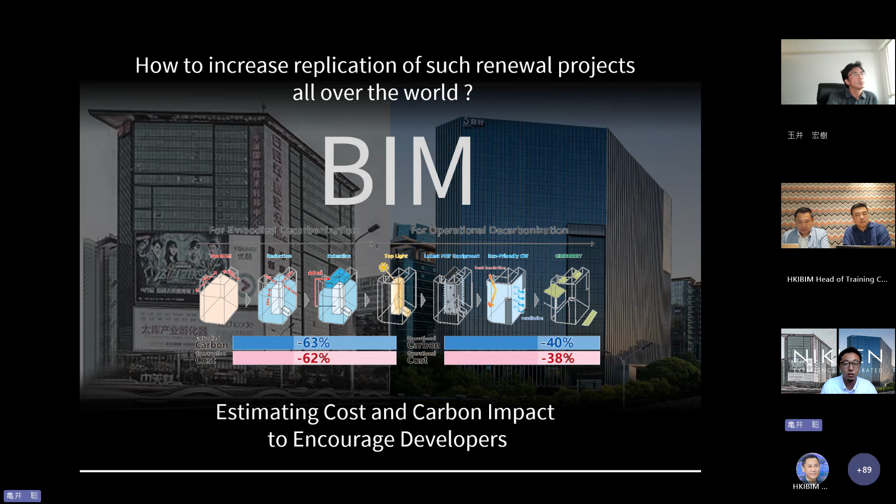The problem is how to increase replication of such renewal projects. I think one answer is that if BIM and other technologies can predictably estimate the efficiency and sustainability, we might be able to encourage more developers and investors to take on these kinds of new developments.

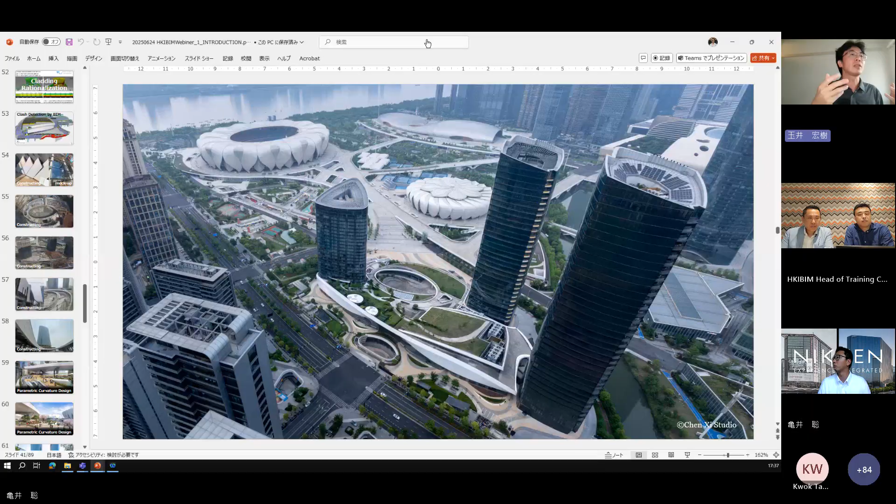Right, because I was thinking of other things also—proposing alternative solutions, not necessarily parametric from one idea, but where the architect and structural engineer also propose three or four ideas, right? Usually we are not giving a client just one idea. If you think this is the best, you still have to give two or three more for the client to be convinced your idea is the best, or to give them an option.

So that's one thing. And sometimes the solution really—the process starts from that position. If you start from a bad idea, parametric design doesn't give you the best answer because it's already handicapped, you know—you're already starting from the minus position. So I think conceptual alternatives from many aspects is the first important thing.

And parametric design is secondary, if I may say—maybe it's too strong a statement to say parametric is only secondary, and I believe that's not entirely true. But as in my story, for example, changing the cross section for a fixed layout of beam and column will help a little bit, but not much. If your big-picture layout concept of the columns and beams is in a better position, you already have a big advantage compared to a bad layout.